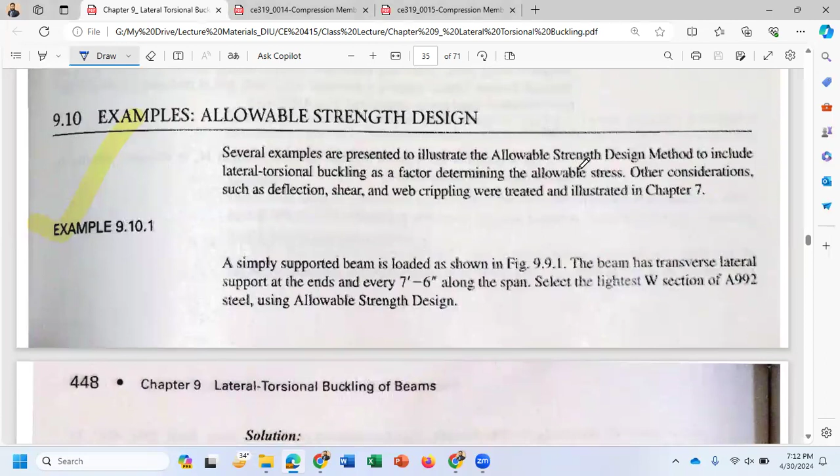To analyze these types of beam, mainly we focus on three parameters: Lb, LP, and LR. These three parameters are basically length of the beam, mainly Lb is the unsupported length of beam, and LP and LR are two lengths of beam that define the behavior of the beam. That means, does the beam have lateral torsional buckling or not? This will be defined or determined by these two parameters, LP and LR.

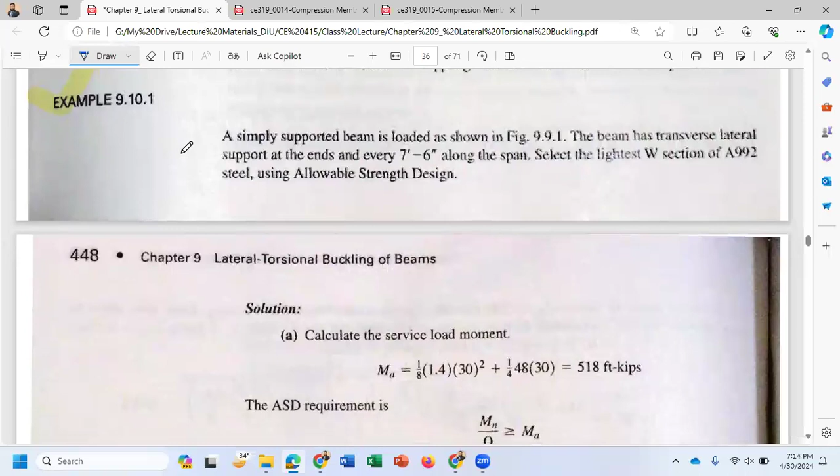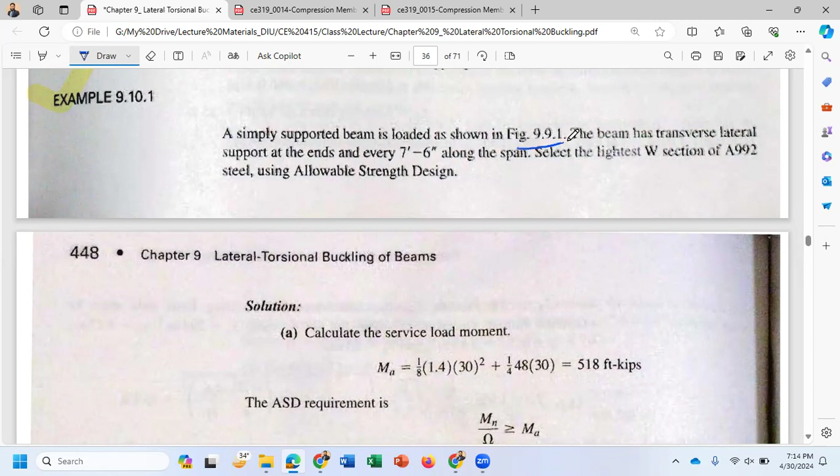9.10.1, the question says a simply supported beam is loaded as shown in figure 9.9.1. So before discussing about 9.10.1,

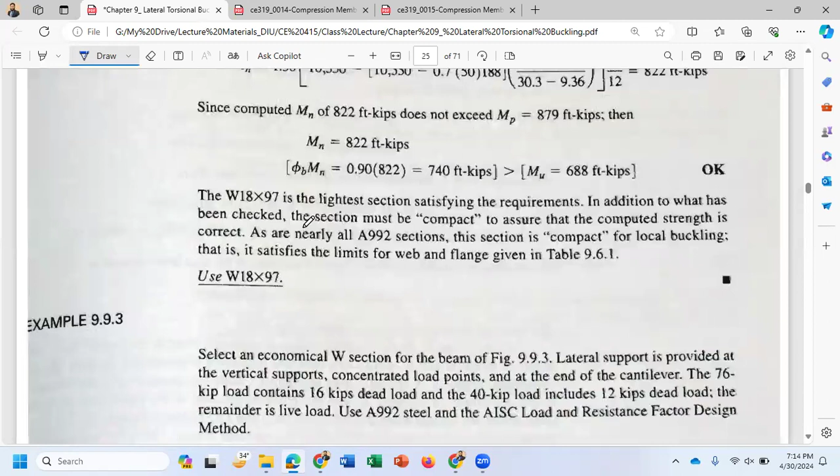just let me discuss problem 1. Here, this is the main question. In that question, you can see that there is a simply supported beam having a UDL and point load. The value of the point load is 48 kip and the UDL value is 1.4 kip per feet. And in the beam, you can see that there is a distance like 7 feet 6 inches.

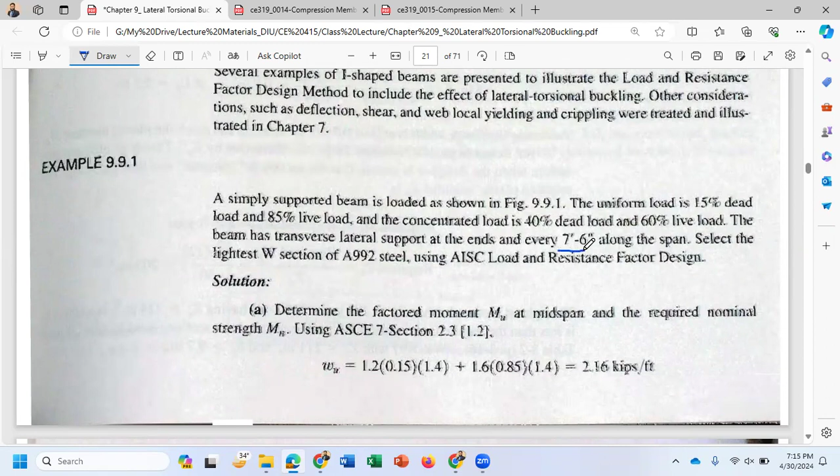In the question, it is indicated that the beam has transverse lateral support at the ends and every 7 feet 6 inches along the span. That means, here in this beam you can see these two supports, a hinge and a roller support. This hinge and roller support have lateral support in the lateral direction, and at every 7 feet 6 inches there is lateral support. That means in this beam there is no continuous lateral support.

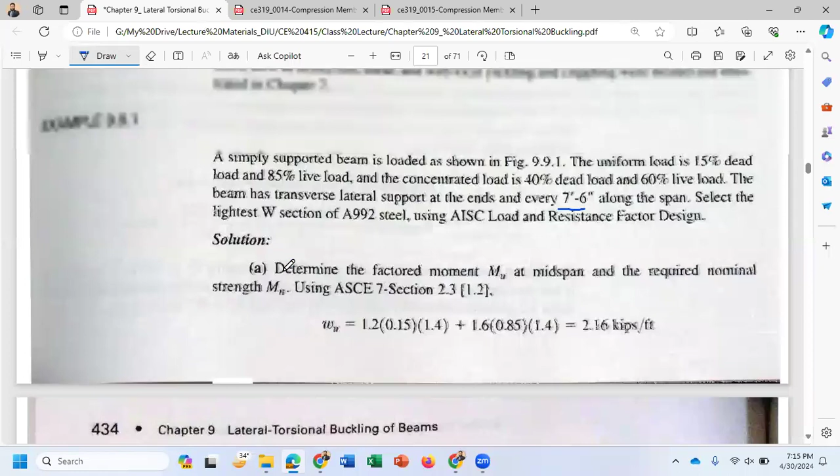The lateral support is provided at 7 feet 6 inch interval in the beam. So a simply supported beam is loaded as shown in figure below that I have already discussed. The uniform load is 15% dead load and 85% live load. Be careful about that. And the concentrated load is 40% dead load and 60% live load.

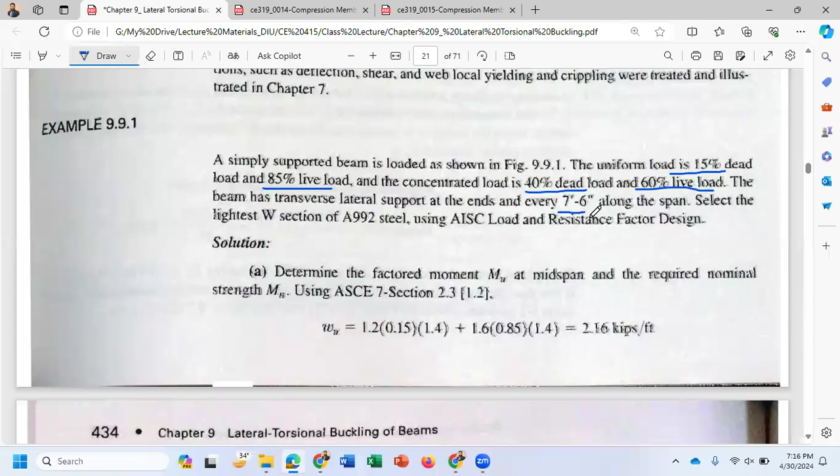As we will solve using LRFD method, to design or analyze a problem using LRFD, we must know the amount of dead load and live load, because to calculate the ultimate load, we will put 1.2 dead load plus 1.6 live load. We must know the amount of dead load and live load to design or analyze a problem using LRFD method.

So now the question says that the beam has transverse lateral support at the ends and every 7 feet 6 inches along the span. You have to select the lightest W section of A992 steel using LRFD method. So here the question says that the steel grade is A992, that means the Fy value will be 50 KSI and Fu value will be 65 KSI. So the design problem is same as before, that we already discussed in chapter number 7 for laterally supported beam.

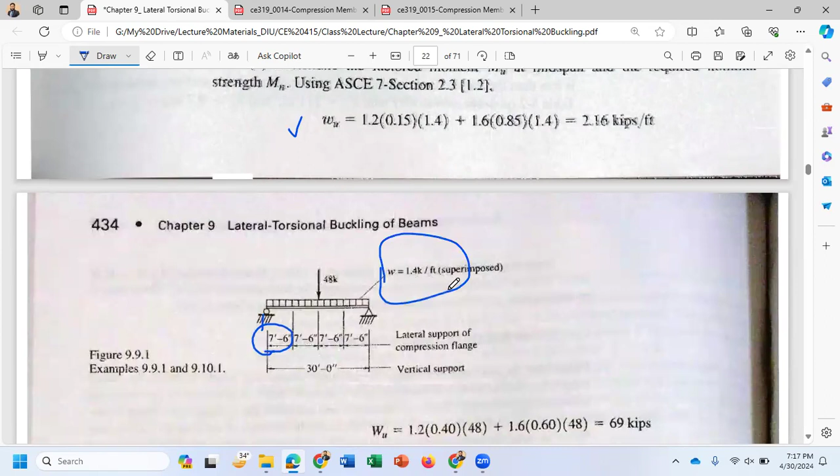First of all, you have to determine ultimate load, which is 1.2 dead load plus 1.6 live load. That includes both dead load and live load, and the dead load percentage is 15%. That means the main equation is 1.2 dead load plus 1.6 live load, and the dead load value will be 15% of this UDL. That means W value is 1.4, and the next portion will be 1.6 live load, so here amount will be 0.85 into 1.4. So total ultimate load will be 2.16 kip per feet here.

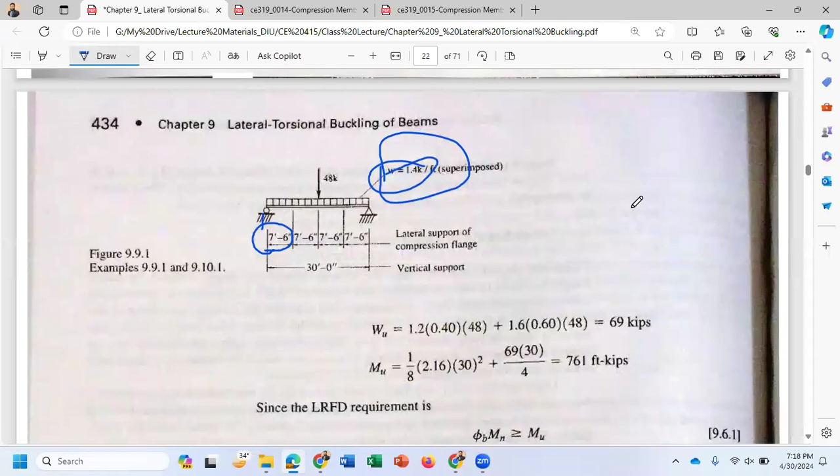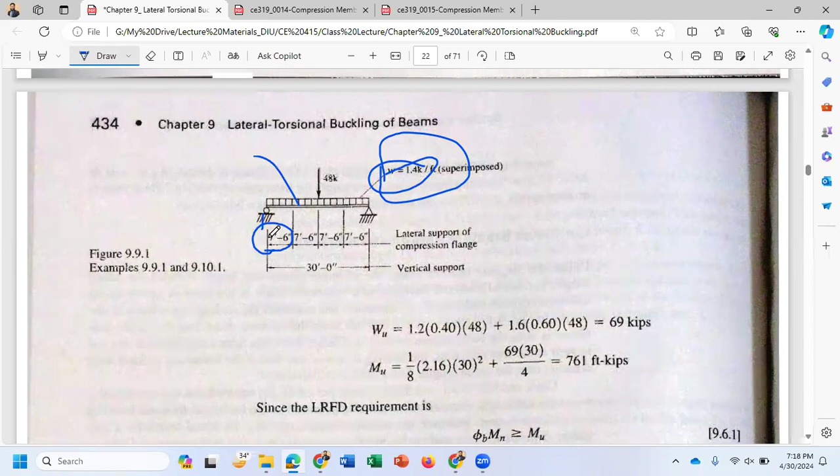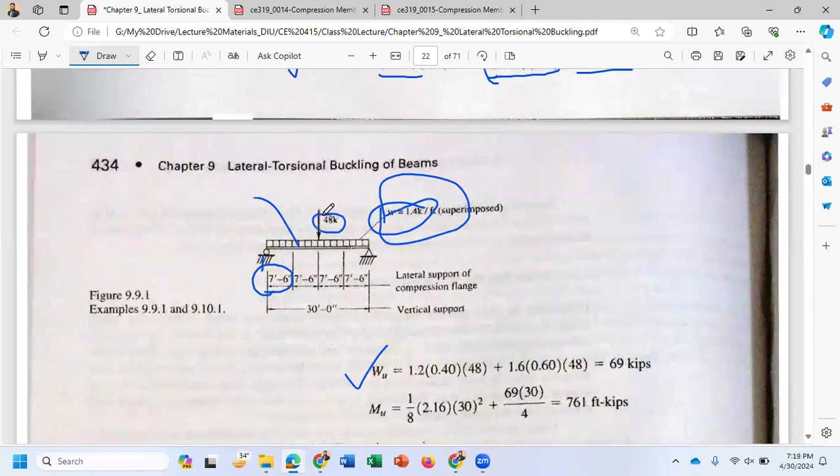After that, you have to calculate the moment, and the moment is WL squared by 8. This will be valid only for the UDL load. But in this beam, you can see that a concentrated load also acts on that beam. So you have to calculate the moment considering both UDL and the concentrated load. The concentrated load value will be 40% dead load and 60% live load. Here, the total concentrated load is 48 kip, that includes 40% dead load and 60% live load. So the ultimate concentrated load will be 1.2 dead load plus 1.6 live load.

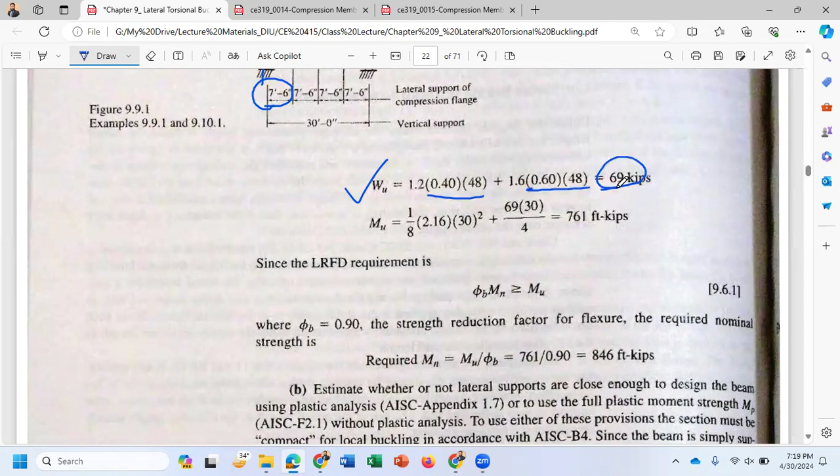The amount is 0.4, which is equal to 0.4 into 48. So total concentrated load is 69 kips. So here in this question, you can see that the concentrated load acts at the midpoint of the beam.

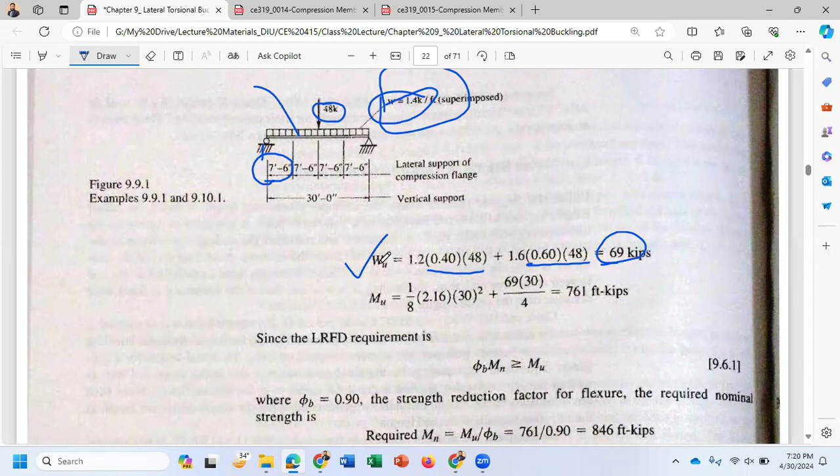For a concentrated load that applies at the midpoint of a beam, the moment for this load will be PL by 4. And for UDL, you know the moment capacity equation, which is WL square by 8. Here the UDL value, factored UDL is 2.16, L is 30 feet.

WL square by 8, this is the UDL. For the concentrated load, which is applied at the midpoint of the beam, the moment equation is PL by 4. Here P value is 69, L is length of the beam, which is 30 feet. So total moment is 761 feet kip.

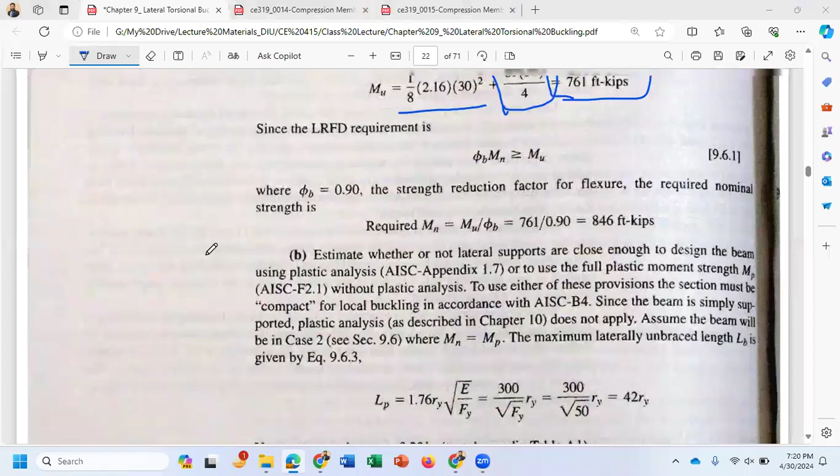This is the total moment. After that, first of all, you have to assume the beam as a compact section. So for a compact section, plastic moment is developed, and the equation for calculating the plastic moment is Fy into Zx. So I'll calculate Zx. This is same as chapter number 7.

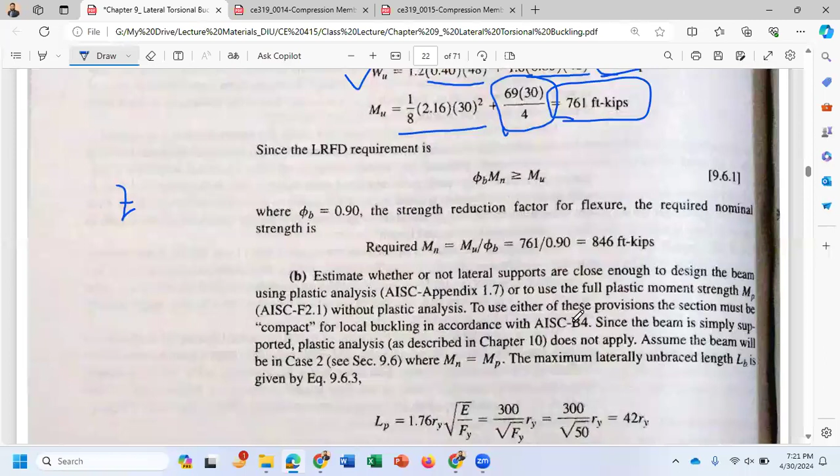So after calculating Zx, if you consider the requirement of lateral support, then the problem will be solved at the first trial. Otherwise, you have to redesign this section several times.

So if you consider the lateral support requirement, that means if you use the LP equation, LP equal to 1.76 Ry into root over E by Fy. Here LP is the unbraced length of the beam, which is equal to LB. We assume that LB and LP are equal, in that sense that there will be no lateral torsional buckling, and lateral torsional buckling will not occur in the case where LB is less than or equal to LP. So if you assume LP and LB are equal, after selection there will be no lateral torsional buckling, and the problem will be solved easily.

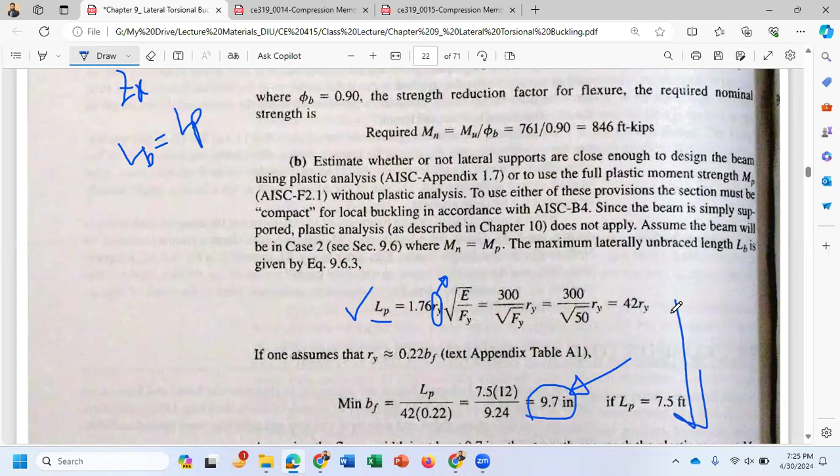So here we assume LP and LB are equal, so the only unknown value is Ry. Using this equation, you can easily calculate it. So forget that procedure discussed in the book, this is the critical one.

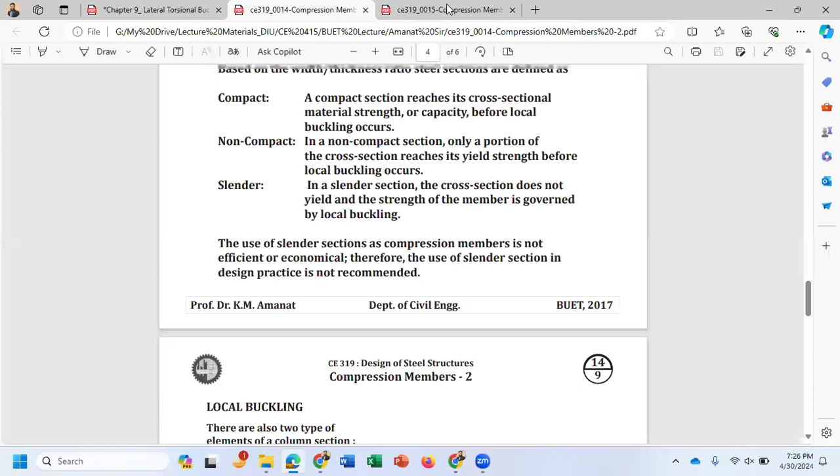So find Ry. You will get that Ry is something 1 point something... or is the question solved here maybe? No. This is a compression member.

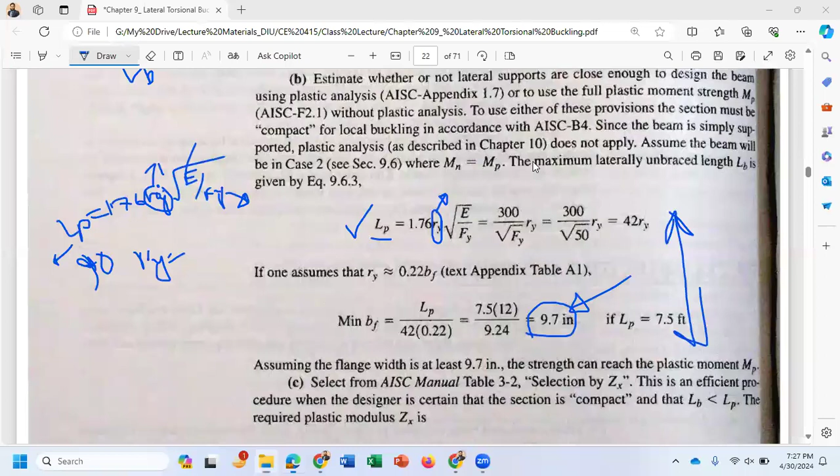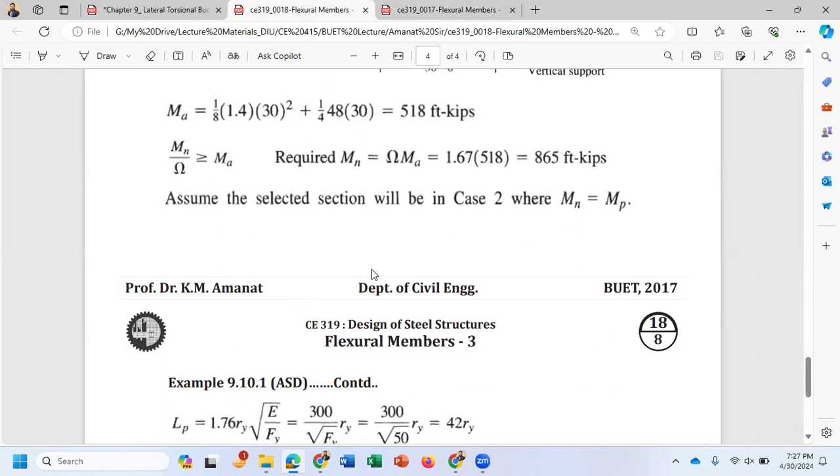Here, the question is discussed. Follow this procedure, okay? So here, you will easily calculate the Ry value. Ry is 2.143 inch, and Zx will be 208 inch cube.

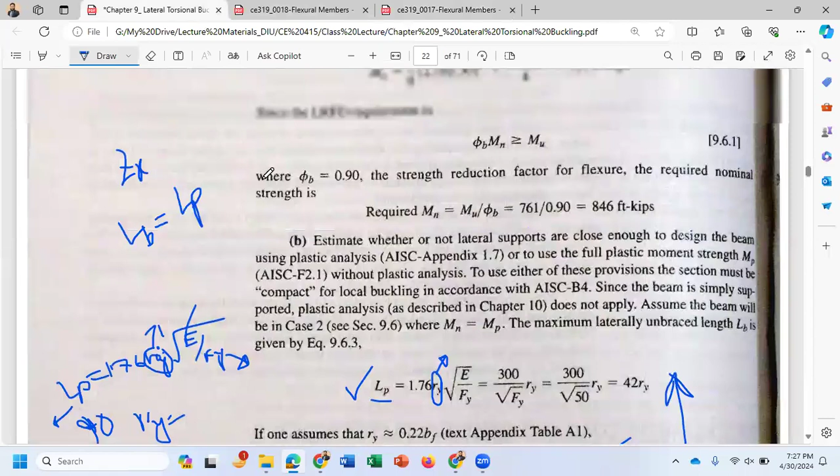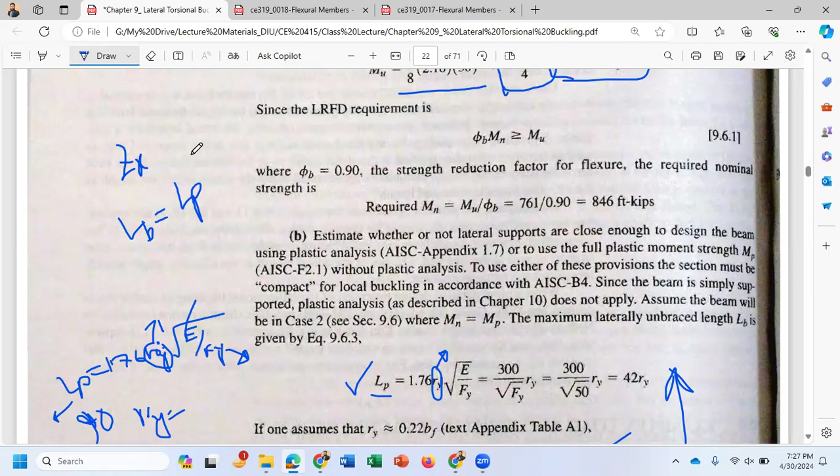So you know how to calculate Zx; I already discussed that. So Zx will be calculated considering the beam as a compact section, and the calculation is the same as the procedure I already discussed in chapter number 7, and the equation is also shown here.

So the Zx requirement is 208 inch cube, required considering the moment demand, and the Ry requirement is 2.143, required for the lateral support requirement. So considering both Ry and Zx, choose a section from table 1.1 where the minimum Zx value is 208 inch cube and the minimum Ry value is 2.143.

Always try to choose a value more than the required value. Suppose here the required value is 2.143 - always try to choose more than that, like 2.24 or 2.34 or 2.5, something like that.

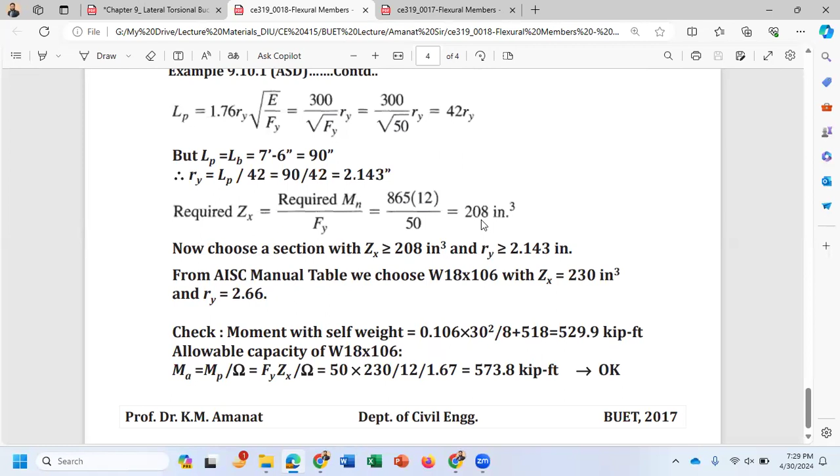Okay, so after calculating Ry and Zx, you have to go to table number 1.1 to find a section that has an Ry value of 2.143 or more, and a minimum Zx value of 208 inch cube or more. After selecting this section considering both Ry and Zx, you have to check the main design strength.

That means moment capacity. So how can you calculate the main design strength or moment resistance? You have to calculate LP and LR. After that, you have to compare LP, LR, and LB. After comparing these three values, you will get the behavior of that beam.

That means either the beam is a compact section, or does the beam have lateral torsional buckling or not? If the beam has lateral torsional buckling, this may be inelastic or elastic. If the beam is affected by inelastic lateral torsional buckling, use the moment capacity equation for that behavior. Or if the buckling is elastic, use the equation for that kind of buckling.

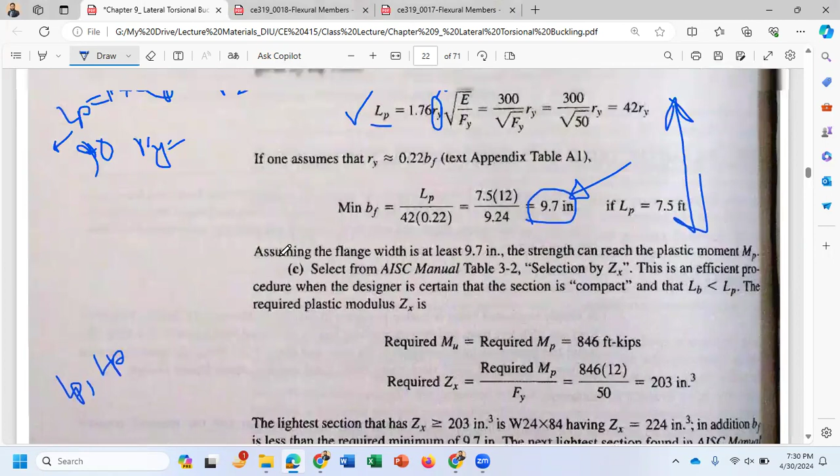So hopefully it will be a compact section because we considered the lateral support requirement before selecting that section. So you will get that this section is a compact section, so there will be no lateral torsional buckling. Just use the moment capacity equation, Mn equal to Fy into Zx.

So for the LRFD method, use phi to calculate the design strength; phi value will be 0.9. In the ASD method, just use omega, and the omega value will be 1.67. So this is the procedure here.

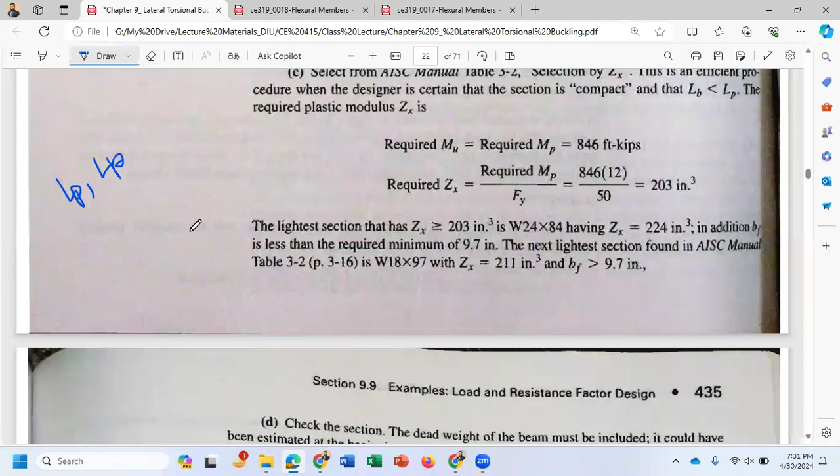First of all, I want to ask Osman and Noor, is there any question here? Can you hear me? Yes sir. So, is the problem clear for you?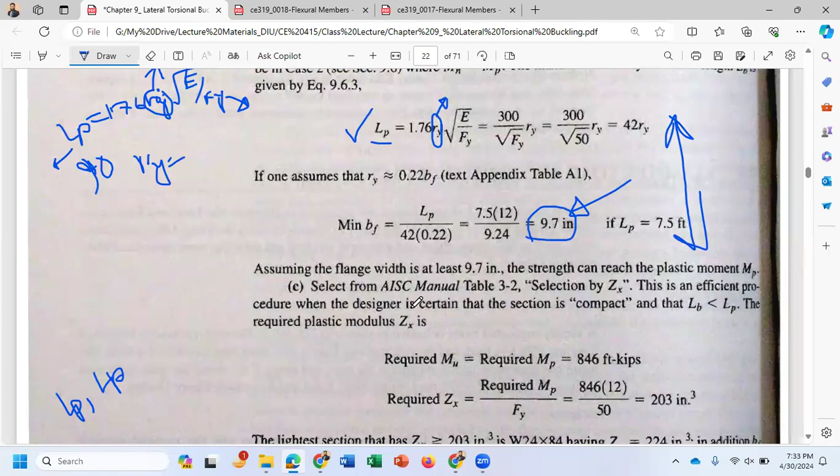প্রথমে দেখতে হবে সেটা ইলাস্টিক নাকি ইনইলাস্টিক। ইলাস্টিক হলে ইলাস্টিকের ফর্মুলা ইউজ করবা, আর ইনইলাস্টিক হলে ইনইলাস্টিকের ফর্মুলা ইউজ করবা, যেটা আগের ক্লাসে আমরা ডিসকাস করেছিলাম।

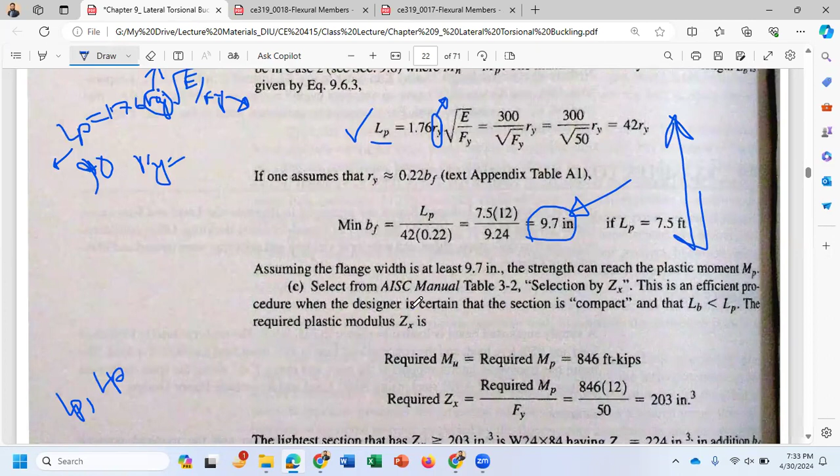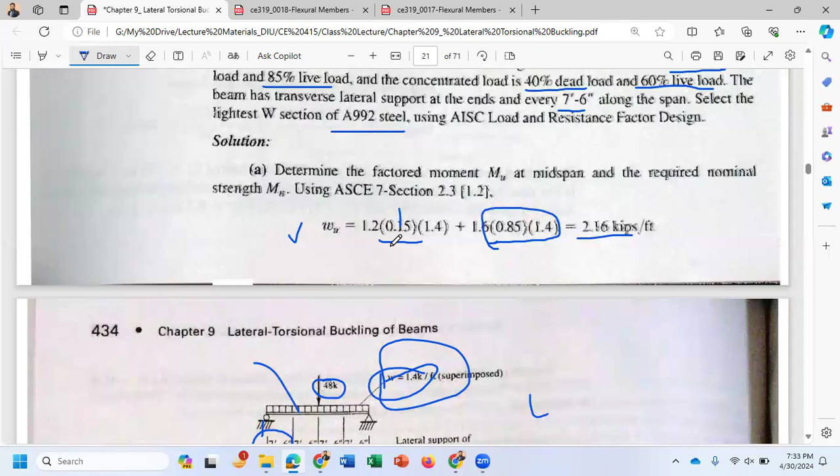এইভাবে নরমালি এই প্রবলেমগুলো চুজ করা হয়। শুরুতে মাথায় রাখবা, ডেড লোড লাইভ লোড নিয়ে কাজ করার সময় আমরা সেল্ফ ওয়েট পয়েন্টটা কনসিডার করতেছিলাম না।

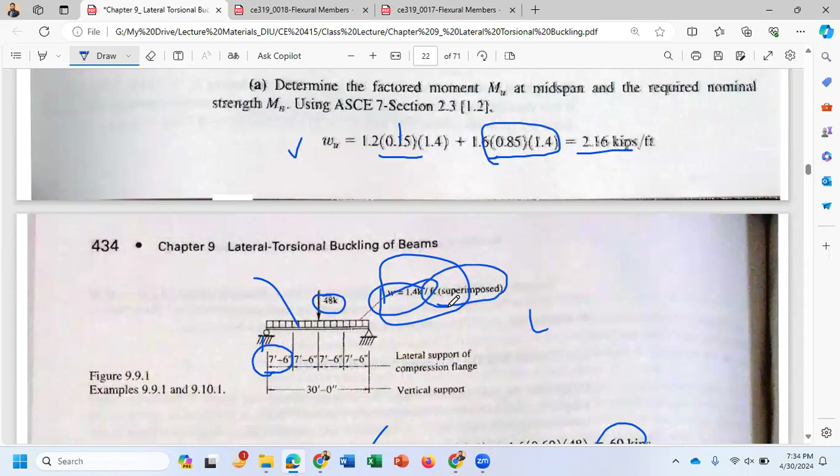সেল্ফ ওয়েট পয়েন্টটা এখানে দিতে হবে, কিন্তু আমরা বিমের সেকশন জানি না, তাই ডেড লোড এখানে সরাসরি বসাতে পারবো না।

যখন তোমরা সেকশনটা সিলেক্ট করে ফেলবা, তারপর ওই সেকশনের ডেড লোডটা দিবা, এবং 1.2 ডেড লোড প্লাস 1.6 লাইভ লোড দিয়ে প্রবলেমটা সলভ করবা। LRFD মেথডে ফাই ইউজ করি আমরা, আর ASD

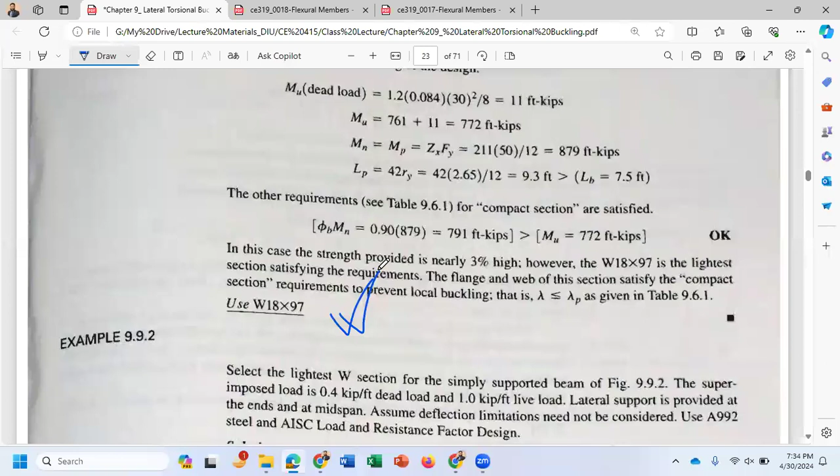মেথডে ওমেগা ইউজ করি। ওমেগার মান আগের চ্যাপ্টার নাম্বার 7-এ যা পড়েছো তাই, ফাইয়ের মান 0.9, ওমেগার মান 1.67। এখানে আরো একটা প্রবলেম আছে, এই প্রবলেমটা দুইটা মেথডে করবা, একটা ASD মেথডে, একটা

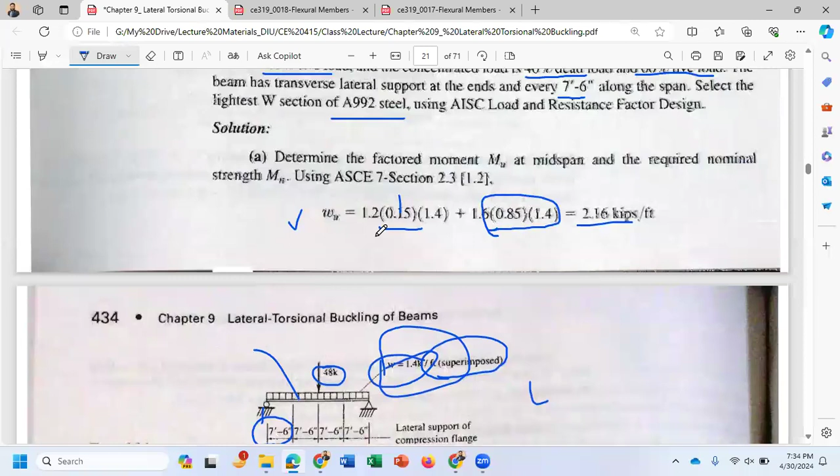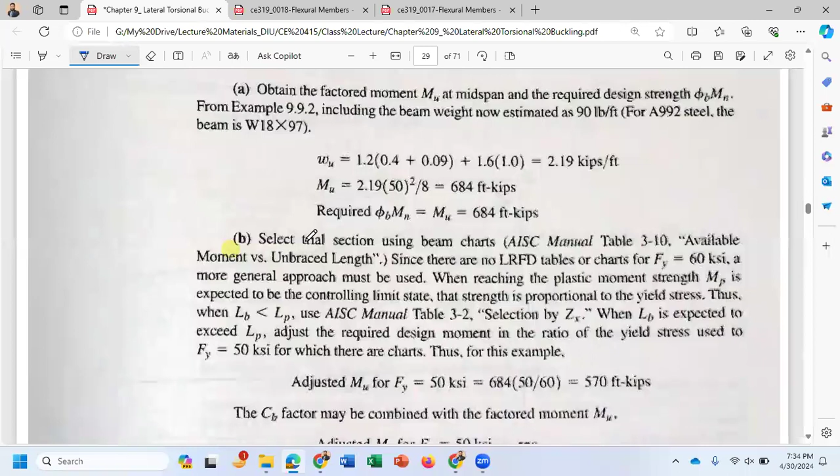LRFD মেথডে। LRFD মেথডটা করে দেওয়া আছে এখানে, বাট ASD মেথডটা দেওয়া আছে প্রবলেম নাম্বার 9.10.1। তাহলে আমরা এখানে দুইটা প্রবলেম সলভ করলাম, একটা 9.9.1, একটা 9.10.1।

এই যে দেখো প্রবলেম হচ্ছে ASD মেথড।

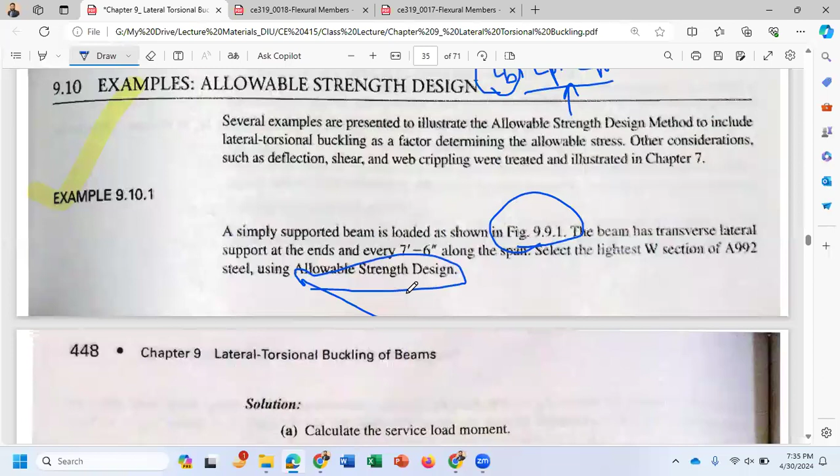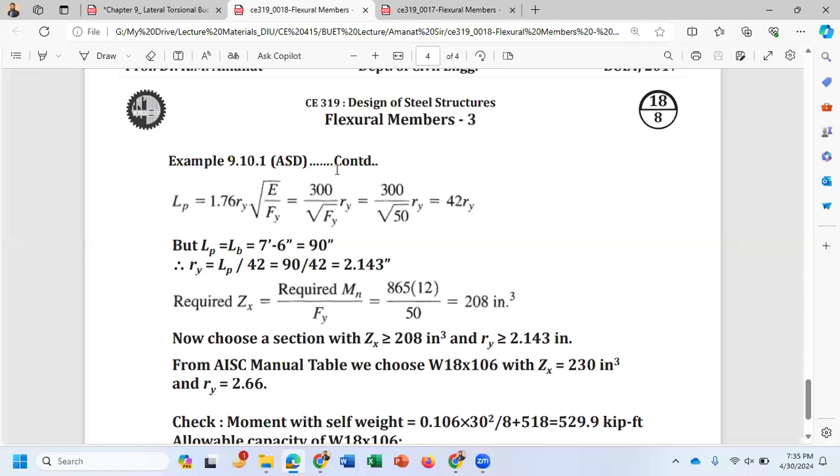আচ্ছা স্যার এখন আসো নেক্সট প্রবলেমটা। হ্যাঁ বলো। স্যার ওই বইয়ের শিটটা মানে ম্যাথের যে পিডিএফটা দেখাইছিলেন, ওটা তো শেয়ার করা হয়নি মনে হয় স্যার। বিএলসি তে নাই, এটা না থাকলে আমি ক্লাস শেষ করে দিয়ে দিচ্ছি। স্যার, ক্লাসরুমে দিলে ভালো হবে। অথবা গুগল ক্লাসরুমে দিয়ে দিচ্ছি।

আচ্ছা, তাহলে 9.9.2 এবং 9.10.2 এই দুটো প্রবলেম সেম প্রবলেম, শুধু একটা LRFD মেথডে, একটা ASD মেথডে। আমরা সেম ওয়েতে ডিসকাস করব। 9.9 for a simply supported beam, the superimposed load is 0.4 kip per feet dead load and 1 kip per feet live load.

Here the question says that the load is superimposed. That means you have to incorporate or add the self weight of that beam with this given load.

And here the lateral support is provided at each end and at mid-span. Assume deflection limitation need not to be considered. That means in chapter 7, we learned how to design a beam considering deflection limitation, so here this criteria is omitted.

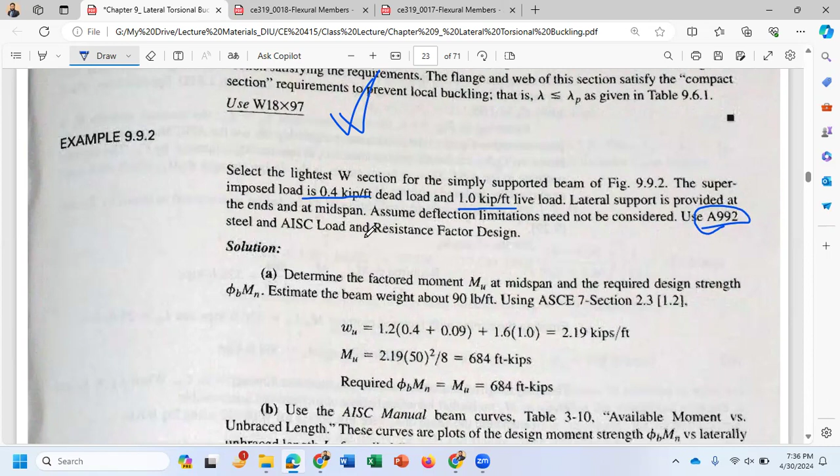So here the steel grade is same as before, A992, meaning Fy value is 50 KSI, and you have to use LRFD method here. So the procedure will be same here.

But in the question, one factor is implemented that I already discussed in the last class. The factor is CB factor, which is applicable for the non-uniform moment on that beam.

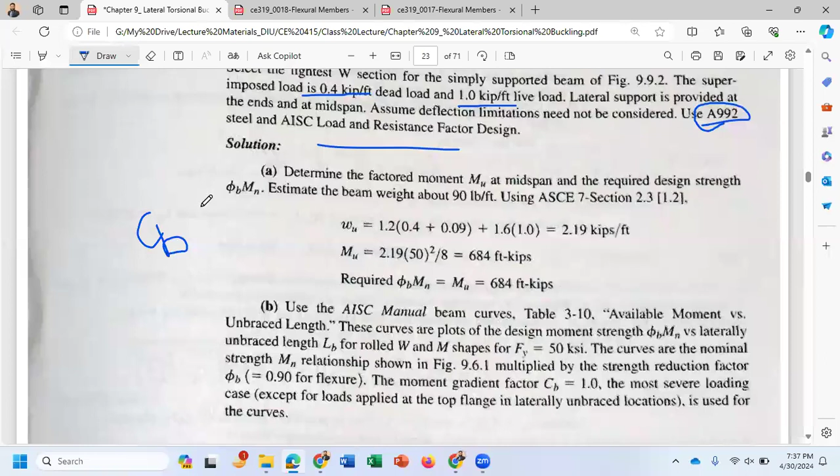So this non-uniformity coefficient will be CB, but in this problem number 9.9.2, just ignore the CB calculation. Use CB equal to 1. I already told you that if the CB value is not given in the question, always assume CB equal to 1.

So here the procedure will be same as before. Hinge support and roller support, and lateral support at the mid span of that beam. So here LB will be 25 feet.

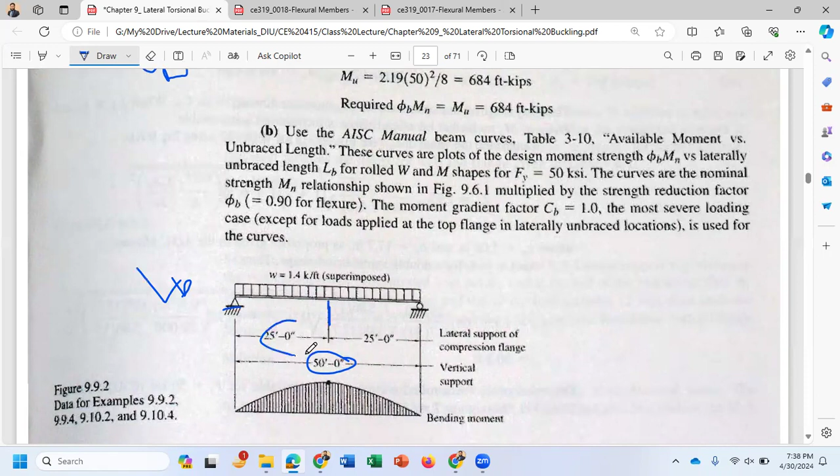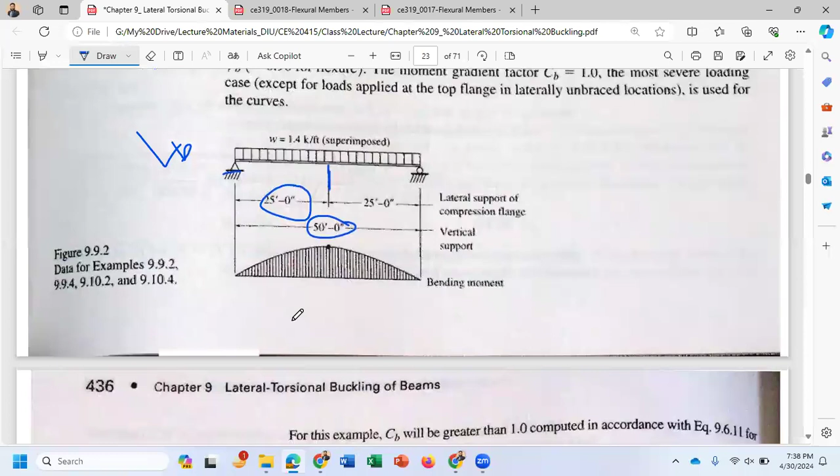Here LB is the unsupported length of that beam. The total length of that beam is 50 feet, as mid span is laterally supported, so the unsupported length of that beam is now 25 feet. This is the difference from example number 9.9.1, but the equation or procedure will be same.

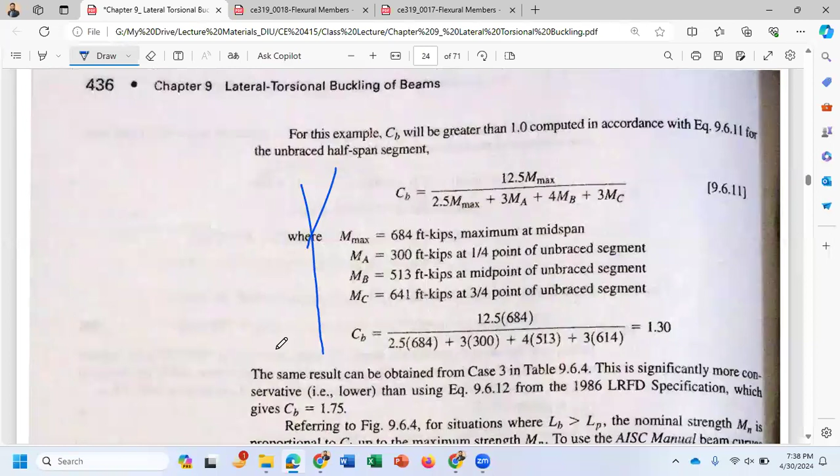Here the calculation procedure of CB is shown, but I already told you that তোমরা এখানে সিবির মানটা সবসময় কি করবা, 1 ধরে কাজ করবা। তাহলে শুরুতেই তোমরা কি করবা?

First of all, you have to calculate RY and ZX, choose a section from table 1. After that, you have to check or calculate both LP and LR and compare these three values, that means LB, LP and LR.

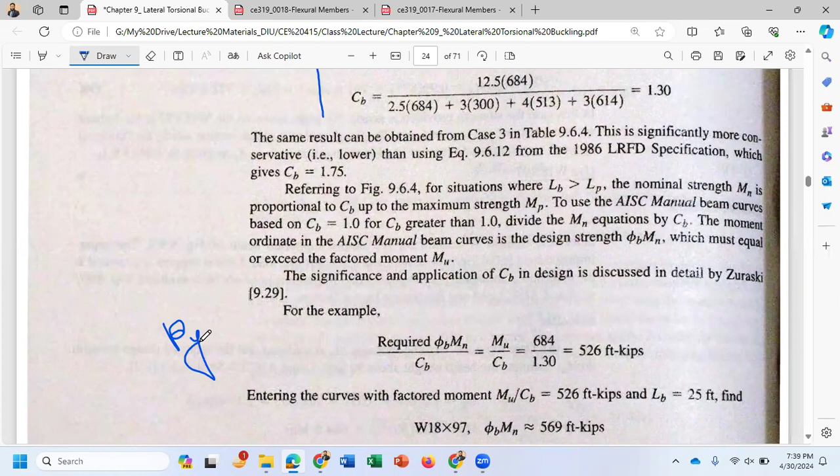So after comparing, you will get the behavior of the beam. So apply the moment capacity equation considering the behavior of that beam. কোশ্চিনে স্যার যে ডাব্লিউ ব্যান্ড সময় 1.2 ডেড লোড প্লাস সাথে 0.09 যে ই করছে স্যার।

ও, 0.09 এটা হচ্ছে অ্যাজিউম করা, ডেড লোড এস্টিমেট দি বিম ওয়েট অ্যাবাউট 90 পাউন্ড পার ফিট। ফরগেট দ্যাট, যেভাবে করাইছি সেভাবে করো। শুরুতে ডেড লোড ছাড়া ক্যালকুলেশন করবা, সেকশন চুজ করবা, এরপরে ওই সেকশনের ডেড লোড কনসিডার করে আলটিমেট লোড বের করবা। মানে 0.4 এর সাথে যে সেকশন নিবা সেই সেকশনের ডেড লোডের মানটা অ্যাড করবা, 7 নম্বর চ্যাপ্টারে যেভাবে করাইছিলাম। বইয়ে এক এক অঙ্ক এক এক ভাবে করানো আছে।

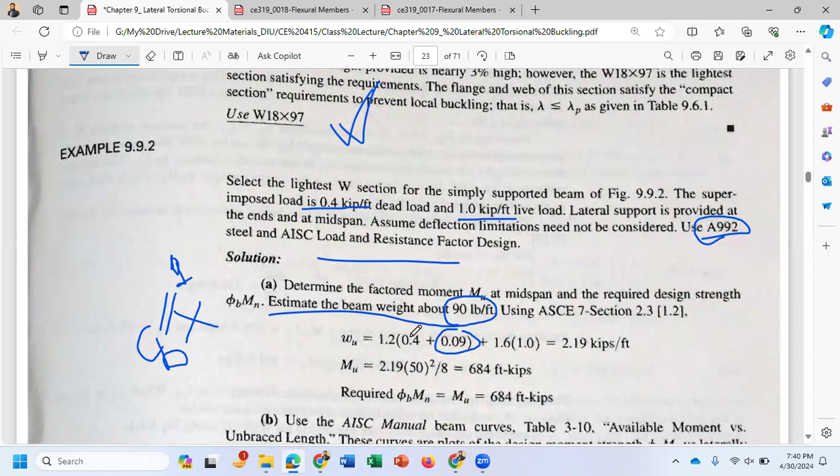ওগুলো আগের অঙ্কটা যেভাবে করলাম এটা সেম ভাবে করবা।

বাট এখানে দেখো তোমাদেরকে সিবি ক্যালকুলেশনটা দেখানো আছে। তাহলে সিবি ক্যালকুলেশনটা একটু আমি তোমাদের দেখাই দিই। There will be a question in final examination about calculating CB factor. So now I will discuss about the CB calculation.

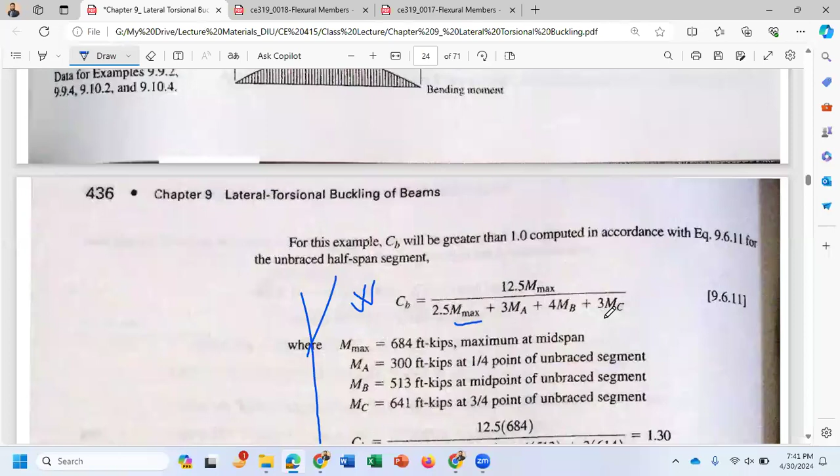The main equation of calculating CB equal to 12.5 Mx. Here Mx is the maximum moment of that beam. The equation is CB equal to 12.5 Mx divided by 2.5 Mx plus 3 Ma plus 4 Mb plus 3 Mc.

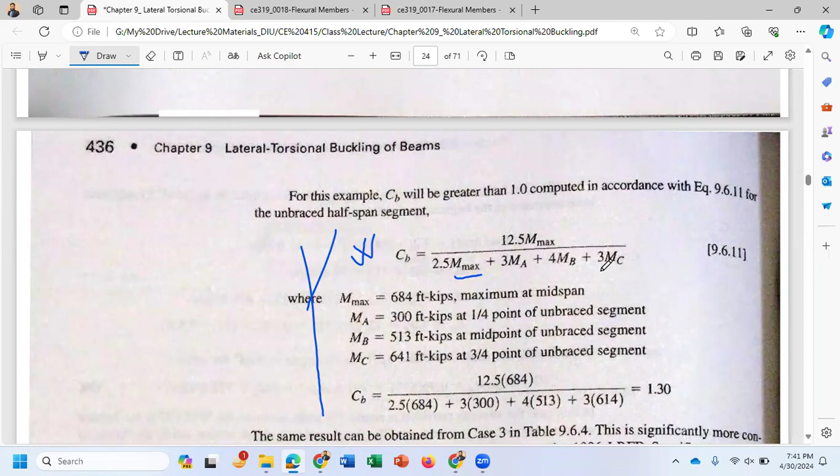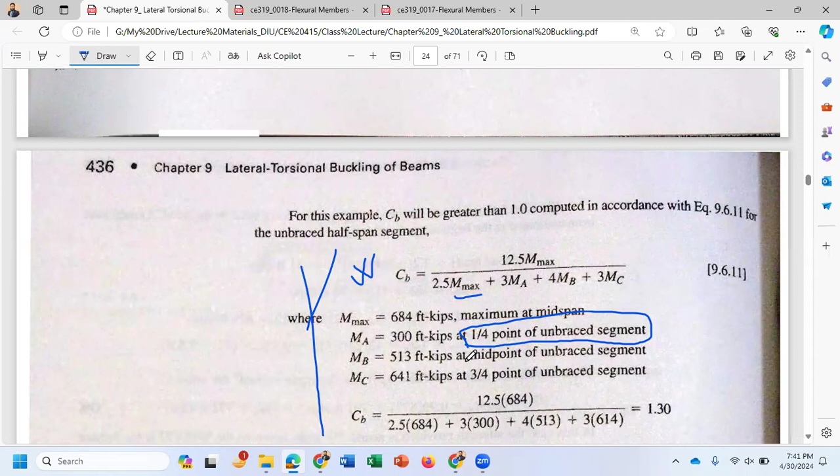Here you need three different moments, Ma, Mb, and Mc. So what is Ma, what is Mb, and what is Mc? Basically, Ma is the moment at the 1/4 point of the unbraced segment of a beam. MB equal to the moment at the midpoint of the unbraced segment, and MC is the moment at the 3/4 point of the unbraced segment.

দেখো এখানে টোটাল আনব্রেস্ট সেগমেন্ট কত? 25 ফিট, তাই না? আনব্রেস্ট সেগমেন্ট বলতে বোঝাচ্ছে আনসাপোর্টেড লেন্থ অফ দ্যাট বিম। So unsupported length, divide this unsupported length by 4.

So if you divide this beam into 4 segments, the first one is the 1/4 point, this one is the midpoint, and this one is the 3/4 point of the unsupported or unbraced length of the beam.

So the moment in this equation, at this position, is MA. Here MA is the value. This is the value of MA. And the moment value at the midpoint of the unsupported beam segment, at this location, is MB, and here this value is MC.

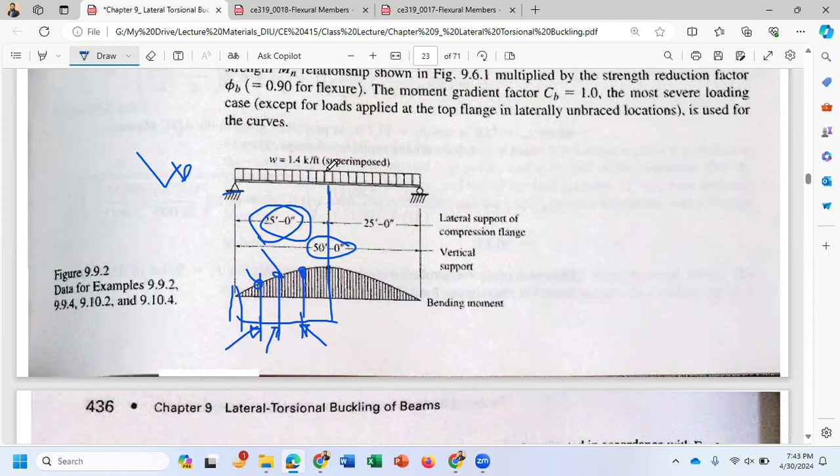Clear? So first of all, you have to calculate the moment, or draw the BMD diagram. So you can easily calculate the moment at the 1/4 point, midpoint, and 3/4 point of the unsupported length for the given load.

So after calculating MA, MB, MC, one more thing needed is Mx. So what is Mx? Mx is the maximum moment of the beam. So from the graph or diagram you can see that in this question, this is the moment.

দেখো এখন স্ক্রিন দেখতে পাচ্ছ মেবি, তাই না? জি স্যার।

আচ্ছা, যেটা নিয়ে ডিসকাস করতেছিলাম, সব সময় কিন্তু টোটাল বিমের 1/4 পয়েন্ট বা মিড পয়েন্ট বা 3/4 পয়েন্ট নিয়ে কাজ করবে না। করবে কতটুকু? যতটুকু তোমার আনসাপোর্টেড লেন্থ। এখানে আনসাপোর্টেড লেন্থ এই 25 ফিট, তোমার কাজ হচ্ছে 4 ভাগে ভাগ করে প্রত্যেকটা 1/4 পয়েন্ট বের করা।

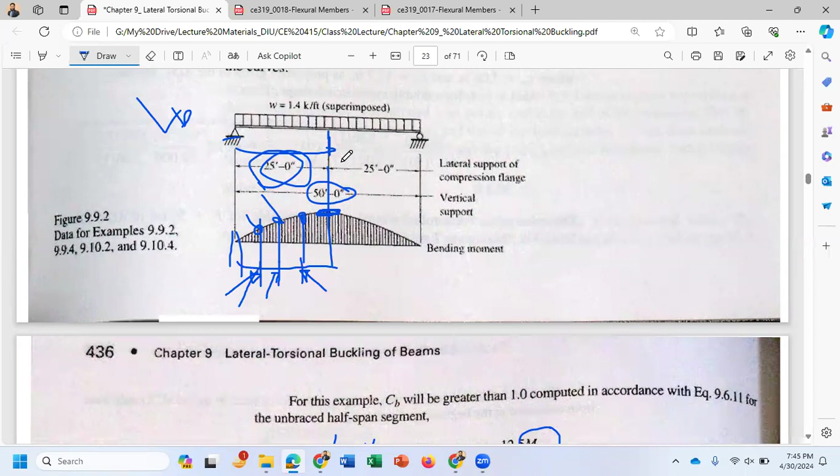আনসাপোর্টেড? এটা পুরাটা 50 ফিট, আনসাপোর্টেড না? 50 ফিট নিয়ে তো কাজ করবো না। আনসাপোর্টেড কতটুকু? 25 ফিট। কারণ তোমাদের কোশ্চেনে বলে দিয়েছে যে the beam is, এই দেখো, lateral support is provided at the end and the mid span।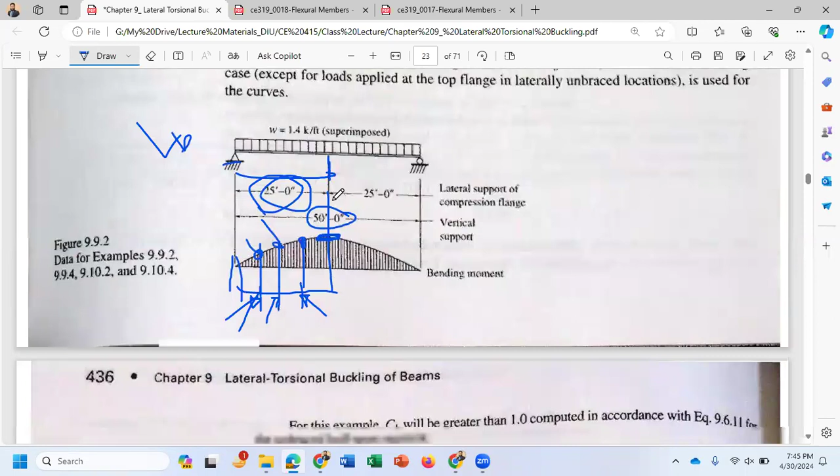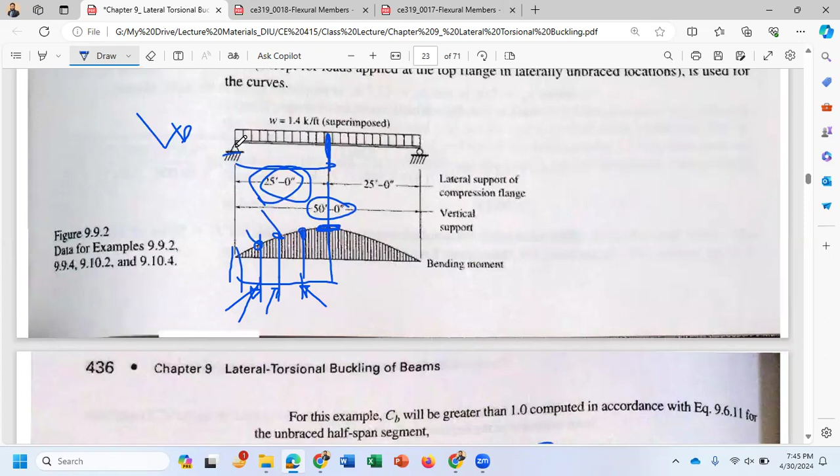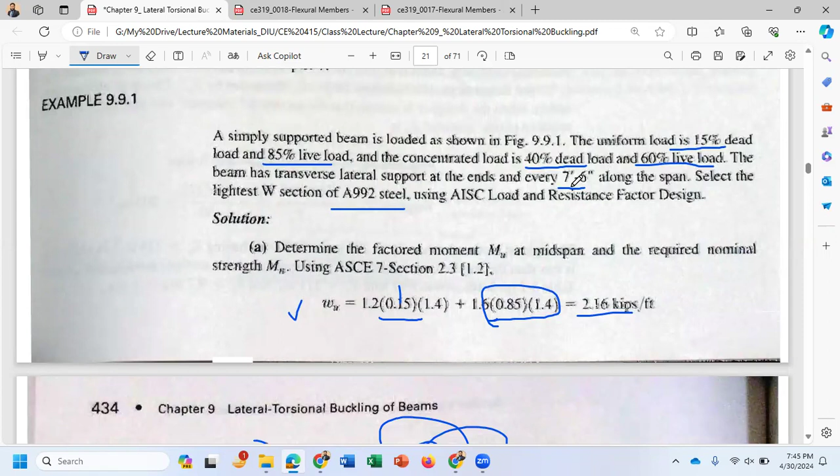মিড স্প্যান মানে কি? টোটাল বিমের মাঝখানে যে ল্যাটারাল সাপোর্ট কোশ্চেনে আছে, তাহলে আনসাপোর্টেড কত এখানে যদি মিড স্প্যানটা উল্লেখ না থাকে? দেখো তোমাদের এখানে বলে দিয়েছে কত। The beam has transverse lateral support at the ends and every 7 feet 6 inch. That means here the unsupported length is 7 feet 6 inch. Clear?

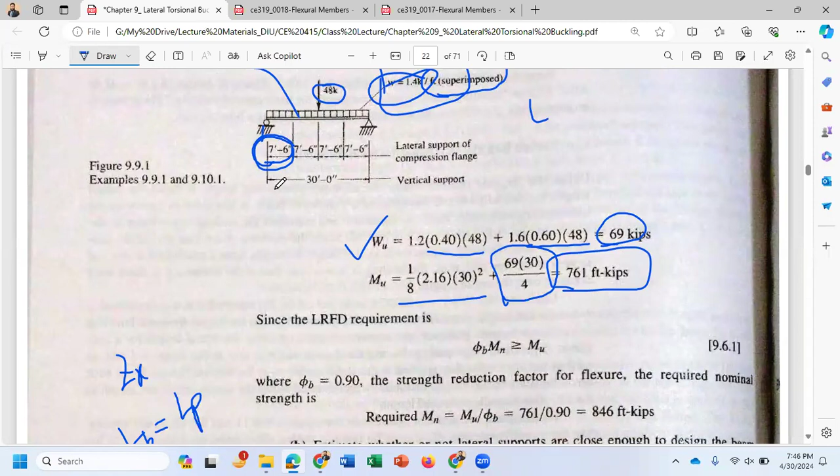So this is the procedure of calculating CB factor. So here in today's class we discussed about two examples.

One is 9.9.1 and 9.9.2. These two problems are solved here considering the LRFD method, and the same problem also discussed in example number 9.10.1 and 9.10.2 using the ASD method.

And one more thing, we have learned how to calculate CB factor. The main equation of calculating the CB factor is shown here, and I have already discussed about calculating all the required moments. That means Mmax, Ma, Mb, and Mc here.

So next class তোমাদের example করতে হবে। পাঁচটা কোনটা কোনটা? 9.1, 9.2 একই প্রবলেম, এলআরএফডি তে করবে, এসডি তে করবা, তাহলে চারটা হয়ে গেল। এখানে করে দেওয়া আছে। আর সিবি ফ্যাক্টর ক্যালকুলেশন।